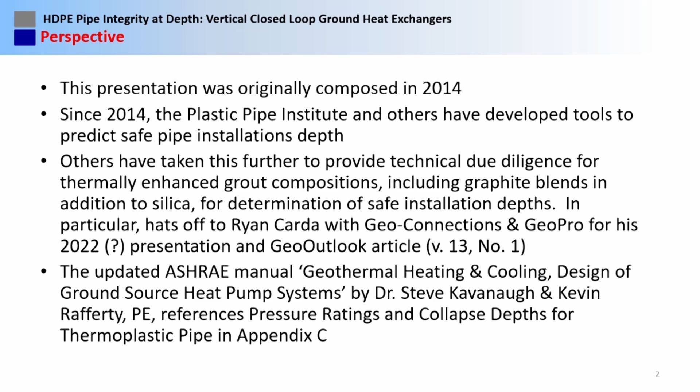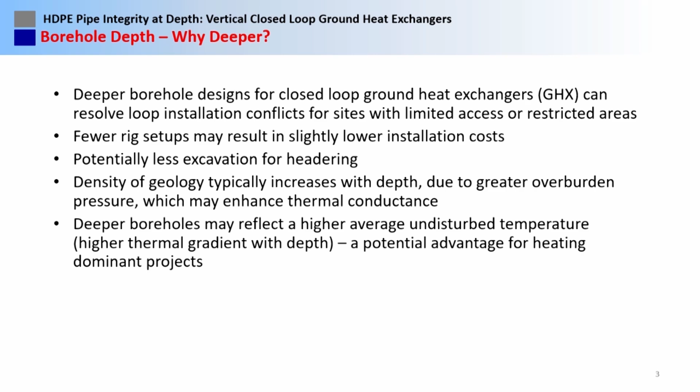So what are the concerns? Well, we worry the pipe's going to burst if it's too deep, or buckle. It'll burst if there's no surrounding pressure - it's going to blow out. On high-rise buildings, you need to put an intermediate heat exchanger between the building and the ground loop.

We need to go deeper, so we have to go to a thicker wall pipe. Well, that's yes and no. I've reviewed projects where we've routinely, for the past 30 or 40 years as an industry, been using DR11 at 300-foot holes. But I ran into one peer review project where the gentleman wanted DR7 on his 300-foot holes. Had a pretty high pressure drop, as you might imagine.

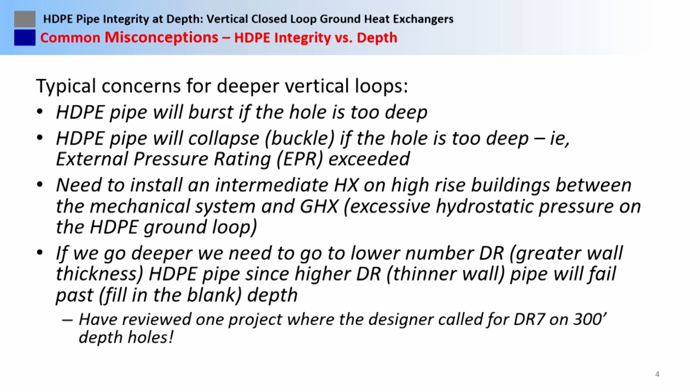So if the preceding concerns were really true, the short answer is our industry would not exist. We would have failed systems right and left. So here are a few examples, anecdotal information.

This is from Beatty Geothermal. Mr. Beatty is now with Salas O'Brien, but he had his own firm, mostly in Toronto. He's got 650-foot deep holes, and this was with PE 3608 - we now have 4710, we'll get into that a little bit more. But he routinely did deeper holes in Toronto because that's all he could do. Just didn't have the land.

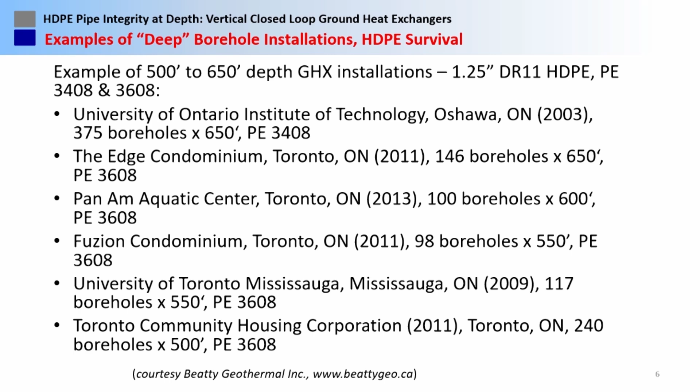Geosource Energy, Stan Reitsma - I don't know if Stan's here or not. Stan's been a great asset too. He's one of those assets I wished I would have met a long time ago, because he routinely goes deeper, because he has to. He's doing like 700 and 800 foot deep holes now.

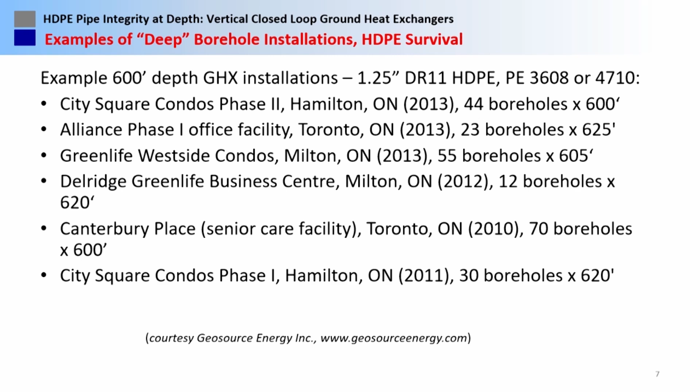I've been in contact with some geo junkies in the Chicago, Illinois area. They've been doing 600-foot depth loop installations for a long time. I found that the Swedes have been going to 200 meters, using DR17 pipe, and they're not failing. Some of my projects in Colorado are routinely going to 500 feet.

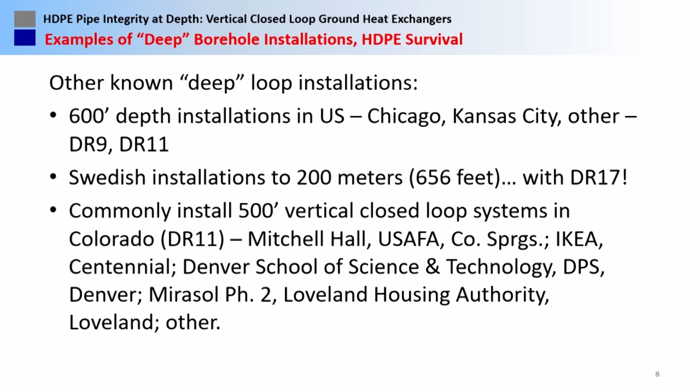We have one at Montana State University where we had no choice - the architect kept reducing the area on us. We had to save the trees, okay, so we go deeper. We went to 700 foot on that. System's working fine. 600, 800, 850, 600, 550 foot - and we're not having problems with these jobs.

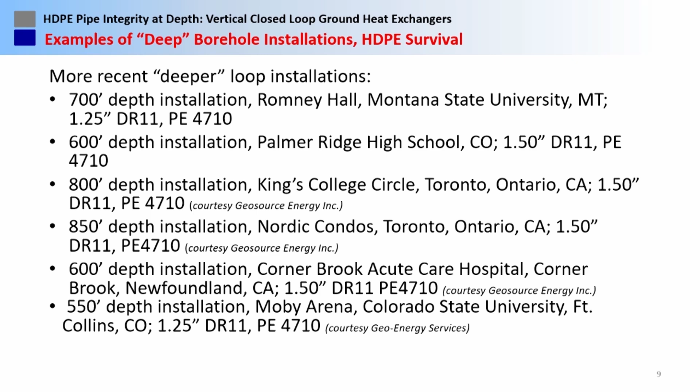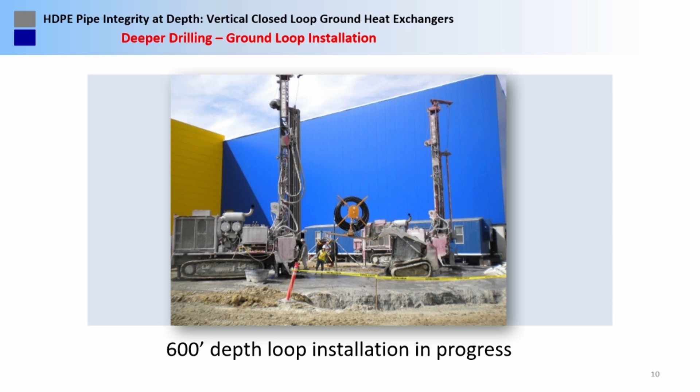And that's Jeff Erlob. Jeff, his company, Salas O'Brien, they're going to be the world dominating ground source heat pump company. They keep sucking people in. Doing a great job.

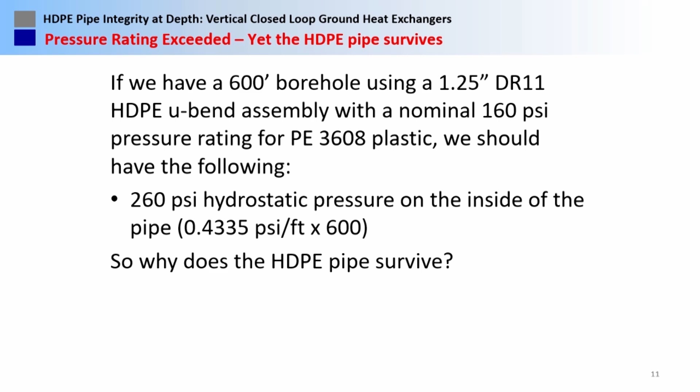We're going to talk about 3608 PE plastic briefly, but remember, the industry has progressed now to 4710, so this is even weaker pipe from that time. One thing we look at is the hydrostatic pressure on the inside of the pipe. You calculate that by 0.4335 PSI per foot times whatever your depth is going to be - pretty simple calculation.

So this example is in downtown Denver - 81 holes, 450 feet deep, but the ground loop has a 9-story building on top of it. So all the hydronic piping goes to the top of that building, and we have no intermediate heat exchanger. It's been up and running since 2008 and has not blown out any pipes yet.

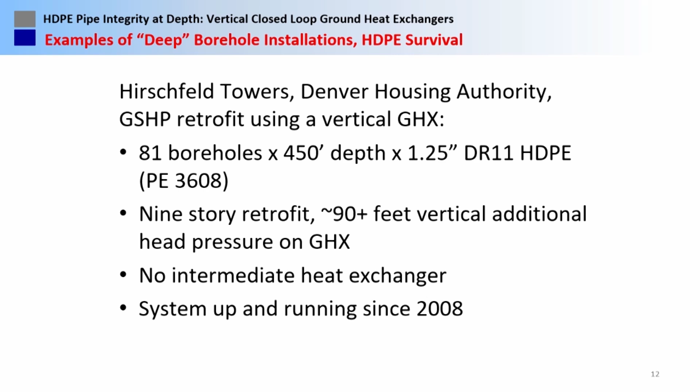Here's what it looks like from the outside. By the way, this building is a retrofit - it was built in the 1960s, so it's low-income housing for Denver Housing Authority. They had 2 problems with the mechanical system: it was dying, and the outside cooling tower - all the neighbors in the neighborhood hated it because it was noisy. The other problem was it's not in a real good neighborhood, so the local, excuse my language, hood rats decided to use the cooling tower for target practice occasionally. So anyway, the city of Denver got tired of fixing it all the time.

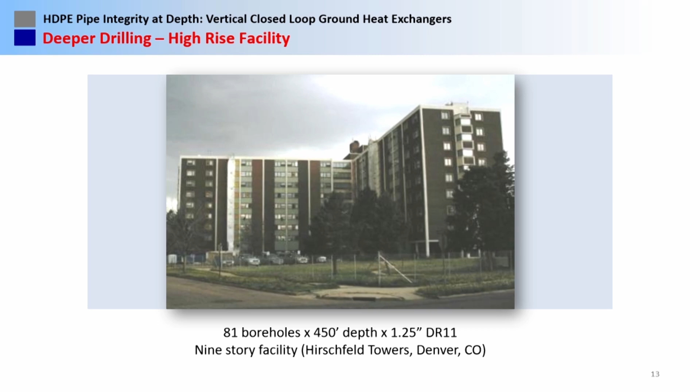So we went to 450 feet deep, inch-and-a-quarter DR11. Like I say, we've got a 9-story building on top of the loop field. So common sense - we have grout around the pipe, we have water in the pipe. So once the pipe is grouted and full of water, how is the pipe going to burst or collapse? It's not - the pressure inside and outside is equalizing out. So that's the common sense part.

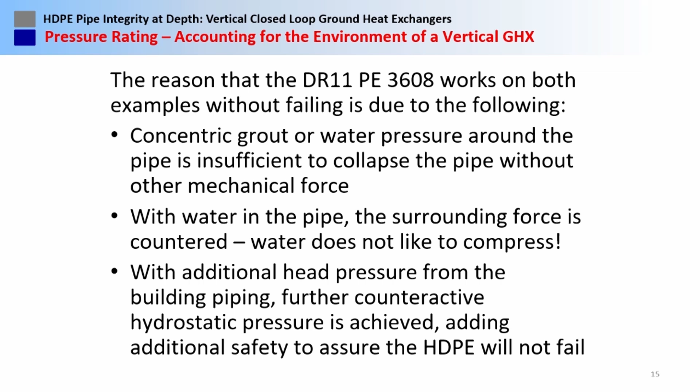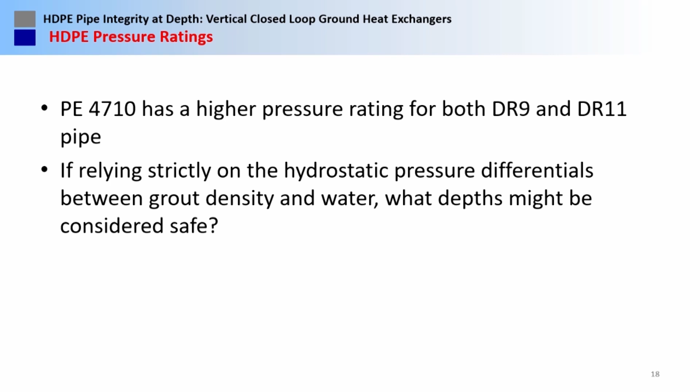But now we have 4710, that's kind of our industry standard for HDPE, so it's even tougher. Accounting for a 600-foot deep hole, the grout using silica grout with a 0.90 thermal conductivity and a 1.0 conductivity thermally enhanced grout, so DR11, we have a nominal safe pressure rating of 200 PSI. So at 600-foot depth, the differential between the water and the grout is very nominal.

And your question, I'm glad you asked that. I want everyone to be thinking about that. If we don't have that unconfined pressure, if we drop a loop in with an ungrouted hole, or we load it into just mud, if it was mud rotary, I want you to be thinking about that, because we're going to get into that and why it's important to grout it fast.

Yes, sir? How are these pressure ratings impacted? We're going to get into that. Yes, sir? Aren't the burst pressures much higher than these?

Aren't there published burst pressures that are much higher than 200? Well, we're going to get into how the ASTM pressures are determined, but these are actual 1/4 the actual burst rating unconfined. So the ASTM values are pretty conservative to begin with.

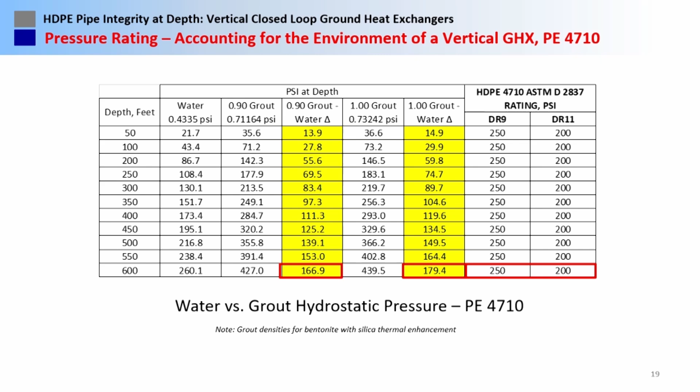And I had a little help with Dr. Matt Anderson, University of Minnesota. Ran into him, he specializes in these kinds of studies. You know, I guess the guy doesn't have a life, he just talks about pressurizing pipe and what it'll tolerate, what it won't, but you can never have enough friends.

Anyways, he helped put up this really cool graph about, based on the published ASTM ratings, we ought to have this kind of safety range for these kind of depths.

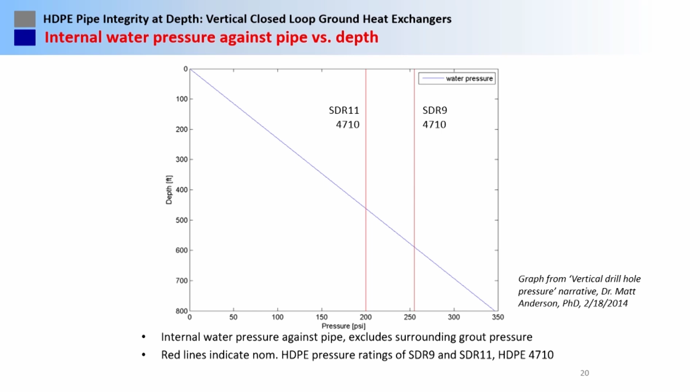And he did another one based on the different densities of thermally enhanced grout using silica. So this is a little dated and vintage, apologize, I haven't been able to update it yet with the bentonite graph, but Ryan Card - I wish he was here right now - actually put together this for thermally enhanced grout with graphite.

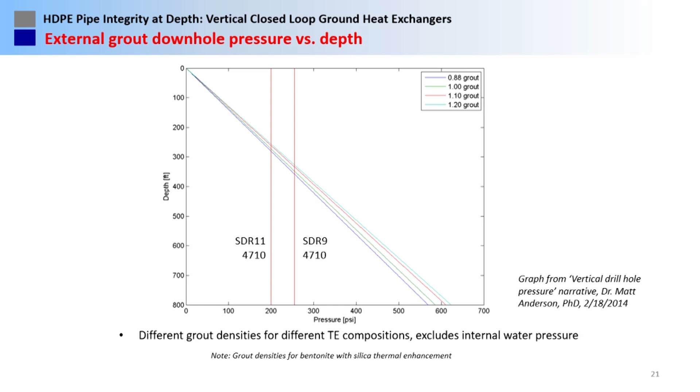So again, with these depths, with the different thermally enhanced grout values, in theory, we should be looking at 700-800 feet on most of these things and still not have a problem.

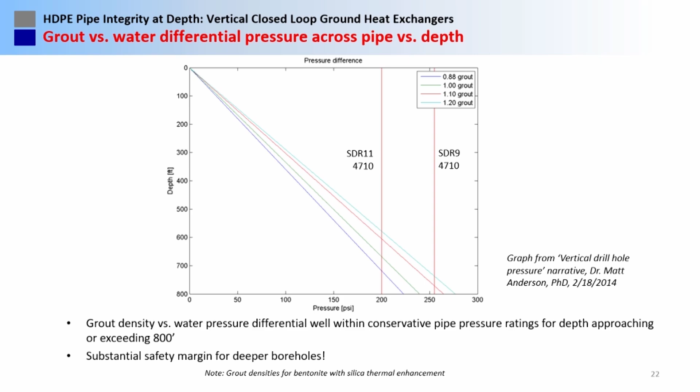So accounting for a vertical loop with 4710, again with the 0.9 grout or 1.0 grout, with the building elevation factored in for our 9-story building, again the difference between the water pressure downhole and the grout with a 9-story building, we're even safer.

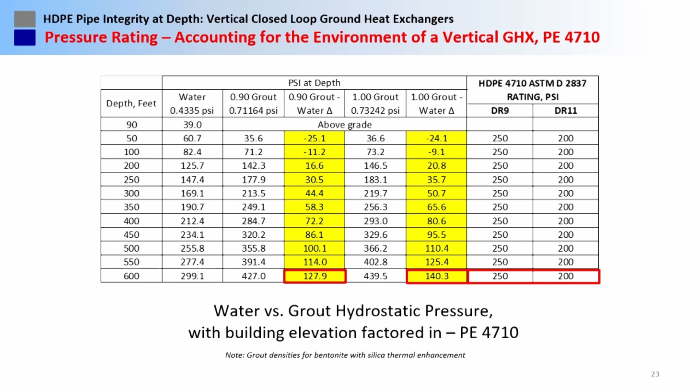So what this suggests is the density of the grout and the water counteract each other. So there's no place really for the pipe to go to fail or anything.

At the time I put this together, I had made the opinion statement that for 600-foot depth, even 3608, we're going to be safe at. But that's a moot issue now, because I don't know any pipe manufacturer that does anything but 4710 now, or the equivalent, the Canadian standard, PE 100. I think that's right.

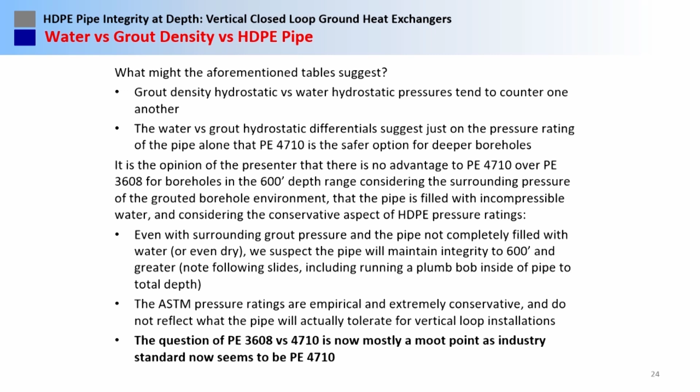But keep in mind, the ASTM pressure ratings are empirical to a certain point. Just a conceptual graphic: you've got water inside the pipe trying to push out, but the grout and surrounding geology are pushing in.

As most of us veterans know, the pipe does not go in and stay perfectly centered. Rotary drills corkscrew the borehole. Sorry for the bad art, I'm not real good at these, but I try. So even if the pipe's up against the wall, it's still pressing against something that's pressing back against the water. Common sense, right? Shouldn't be an issue.

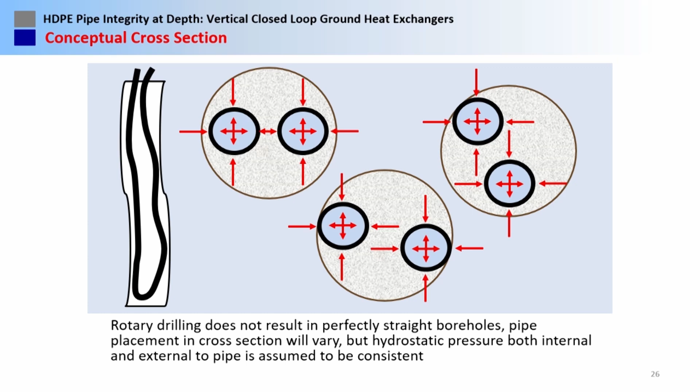So our friendly driller, who was trying to make grief for me after I caught him not grouting the holes in Kansas, said, 'I'm going to prove they're failed.' So we cut the pipe on some holes and sent down a plumb bob.

I swear, our last martini was at 10 o'clock last night. I haven't had any today yet. So...

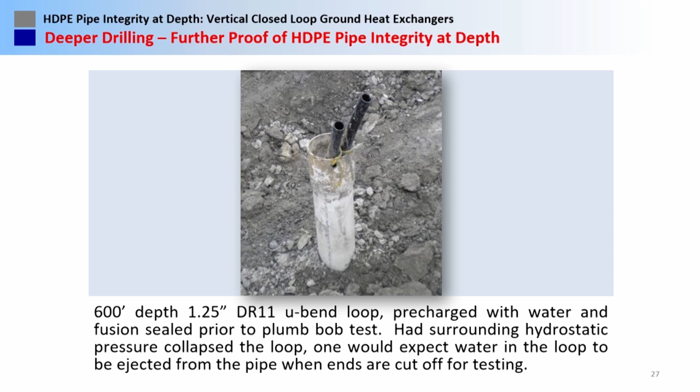So we tested one ground loop, grouted full of water. The plumb bob went down both legs without a problem, came back fine. We moved to the next one, and the next one, and the next one. Then I said, hey, we've got a couple holes you haven't grouted yet. Let's put that plumb bob down there, and let's pressure test it too, because theoretically it should blow out. Guess what? It didn't. Worked just fine.

So Mr. Driller, who by the way I did not want on the job - there were like 3 drilling contractors experienced in this part of Kansas City for deeper boreholes, and you could have spit on all their bids and hit them, their costs were about the same. Well, this guy came from 3 states away and was 50% cheaper. The reason he was 50% cheaper was he wasn't grouting the holes. He wasn't following specs, and he got caught.

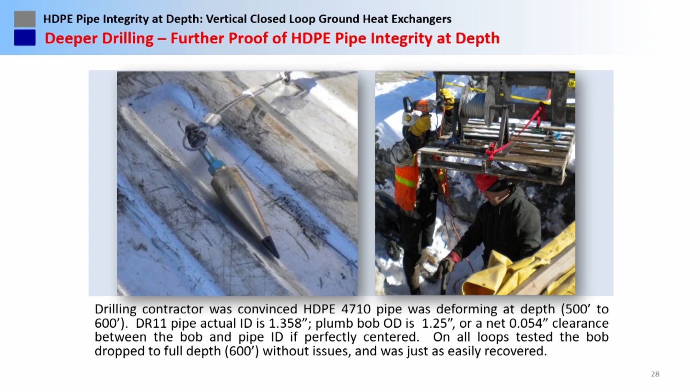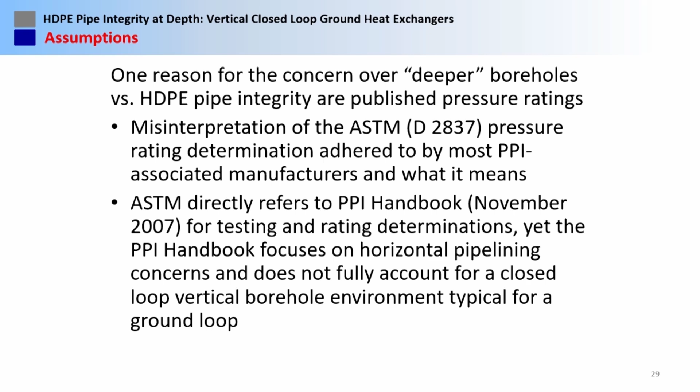So one of the reasons people are concerned is they don't understand how the ASTM standards are determined. The Plastic Pipe Institute has since updated this, by the way, so this is a little dated, I apologize. But at the time, we really didn't have ASTM information in the handbook for the environment of a vertical ground loop. Very frustrating. So how's it determined?

Pressure rating in PSI for the ASTM D2837 value is twice the hydrostatic design stress rating in PSI, divided by the DR ratio minus 1. So for 3608, we can actually go to 800 PSI, and the pipe, that's about where it should burst without any confinement. For 4710, we should be able to go to 1,000 PSI before we're concerned about bursting it with no confining pressure.

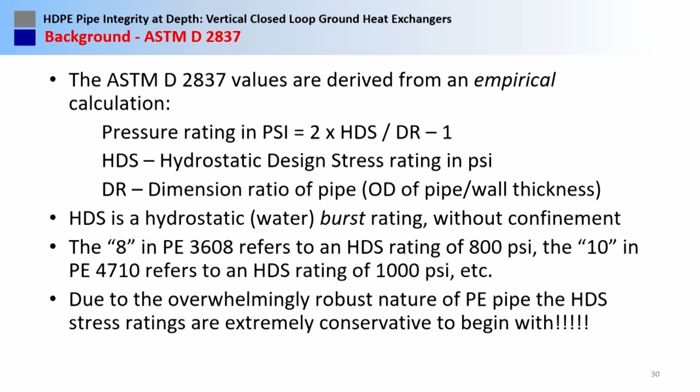So for PE 3608, DR11, that's how we get the 160 PSI rating. But that DR11 pressure rating, it doesn't matter if it's 3/4 inch pipe or 6 inch pipe, it's the same pressure rating. Well, that doesn't make sense, because have you guys seen a cross section of 6 inch DR11 HDPE? You can run over that pipe with a 1-ton truck, and you might get it to oval a little bit, but that's about it.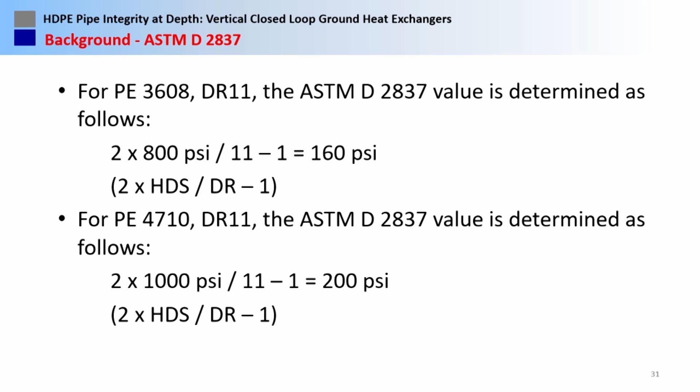This stuff is tough. So for 4710, using the same calculation for how the 2837 value is determined, we should be more than safe to 200 psi. I won't go in and read all this, we'll burn too much time.

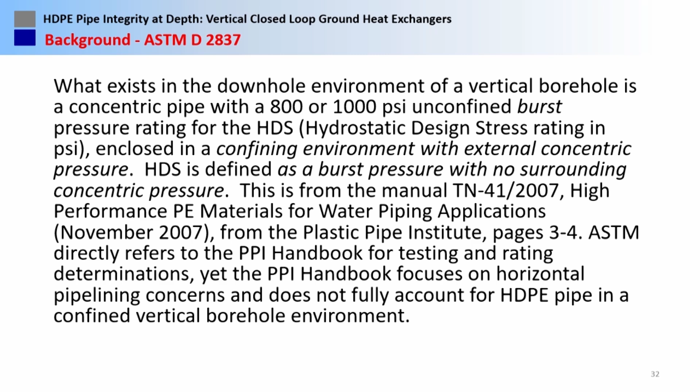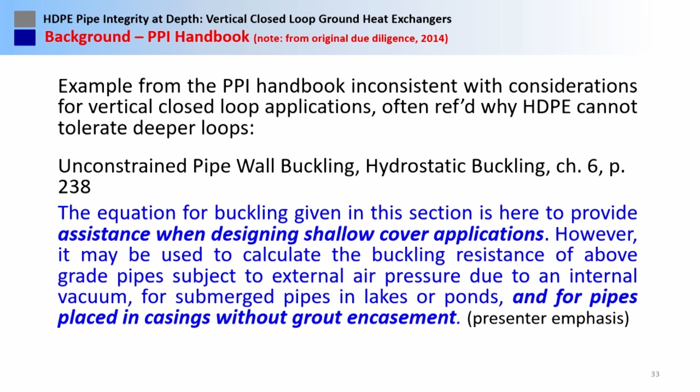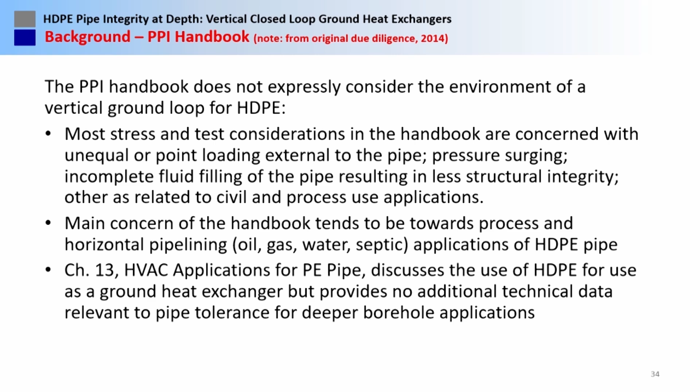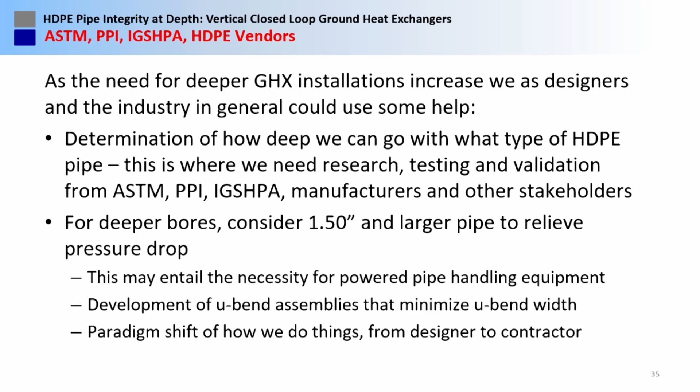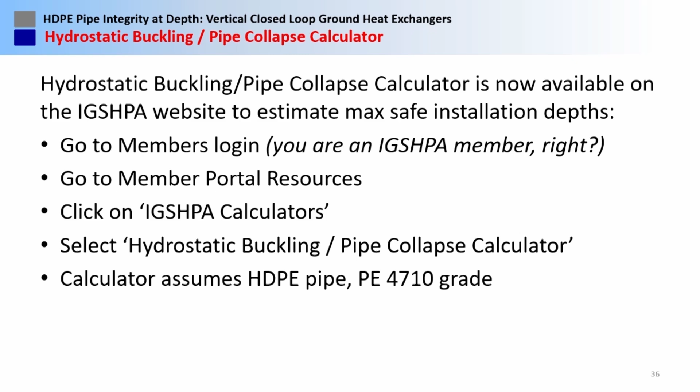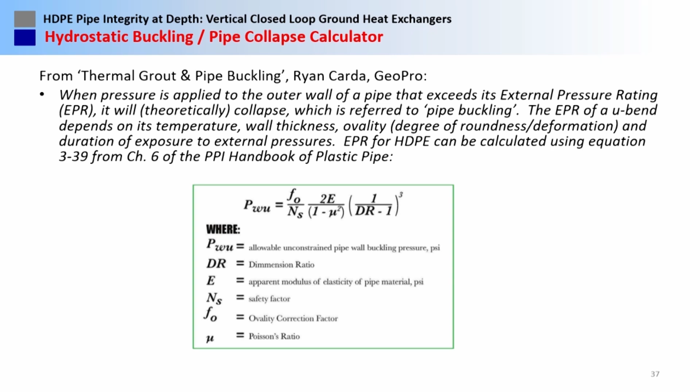Directly from Ryan's comments, the external pressure rating, or EPR, is where it will theoretically collapse, referred to as pipe buckling. EPR of a U-bend depends on its temperature, wall thickness, ovality - that is the degree of roundness or deformation - and duration of exposure to external pressures.

That's really important when you think about it - you get the loop loaded with water, why you don't want to wait to grout it. Not only is it a bad thing, you might bridge off a borehole, but you want to get that confined pressure around that pipe as soon as you can. And the deeper you go, the more important that becomes.

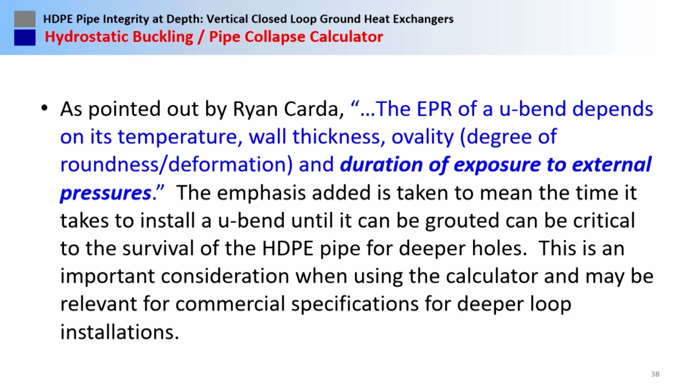So I ran a couple of the calculations just as an example. Assume DR11 1.25 pipe, pipe ovality of 3%. By the way, on the calculator, it'll have some suggestions like what to select for safety factor, ovality, that kind of thing, if you don't understand all that. The important part, in my mind, is the duration of sustained loading.

That's how long does it take to actually grout the hole after you've got it loaded in the borehole. In this case, I made an assumption - maybe it's in the summer, so we're loading that pipe while it's 95 degrees outside. We also consider Poisson's ratio and density - that's for water, 62.4 pounds per cubic foot of water. And I've had people say, well, we've got antifreeze. No, you don't put antifreeze in until you've got the air purged out of the system. You should never do that.

Why? Propylene glycol, if you're using that for antifreeze, likes to entrain air. So why would you want to fight that when you're purging? Just a tip. And then also, we take into account the grout density, and there are tables to select from on the online calculator. So in this case, for 1.25 DR11 pipe, we should be able to go to 800 feet safely.

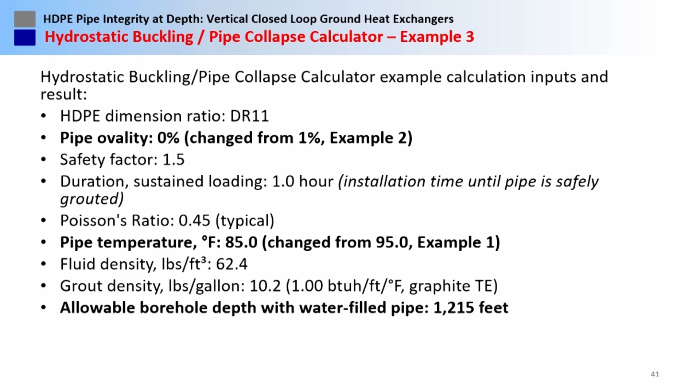Now, here's the what if scenarios. Talking with Stan Reitsma, who's a veteran at deep hole loop installation, he's concerned - what if you got a bunch of scratches? Not general handling, but a deep gouge into that pipe. We don't really know if that could harm the integrity of that pipe, but it could, in theory. So again, it's how you handle that pipe. There's not much you can do once the pipe's scraping along the edge of the borehole. So there's a lot of unknowns still.

The other thing is when you start working with that calculator, ovality, or how round that pipe is going in the hole, is really, really important. It will really limit you on a safe depth, or what the formula says it will do.

I just, when I go out with drillers, I share this information, and they're concerned. They don't want a failed system. So they work with their guys to try and stay above board.

My problem now is our industry is really heating up, so we're going to attract new drillers. We need them, we need them. The problem is a lot of them aren't going to have the experience and not understand these critical considerations.

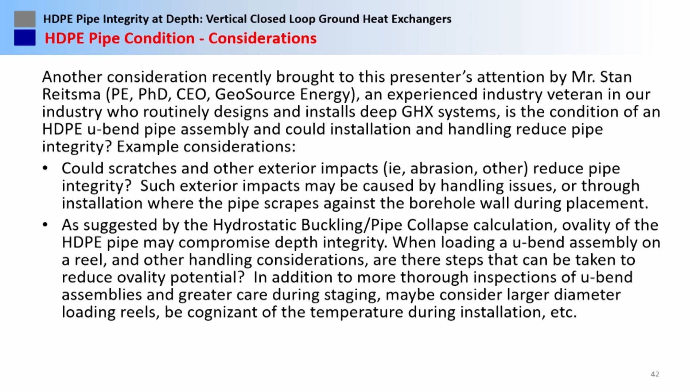So, conclusion and options. In my opinion, if it's purpose-milled for going in a ground loop, it'll tolerate a lot deeper depth than you think it will, or what the ASTM unconfined pressure ratings say.

Good pipe handling is important. And what I think is most critical, based on the calculations, is how long it takes you to grout that hole - that's very important. So when I catch a driller saying, I'm going to drill all week and grout the last day - no, you're grouting as soon as you are at total depth, load that pipe.

Either the tremie pipe goes down with the U-bend or follows it immediately. And well, that's going to take more time - we'll do it, that was part of the spec, we expect it. Most competent drillers that are responsible say, I understand that we're going to do it the right way.

I still think we've got a theoretical formula now - I'm not very smart for research and all, but I would love to see the Plastic Pipe Institute, various pipe manufacturers, figure out what we can really do with pipe. How deep can we really go and have some due diligence and actual research? Because we know it'll go deeper - we've got a theoretical calculator for that now. But where the rubber meets the road is some actual testing.

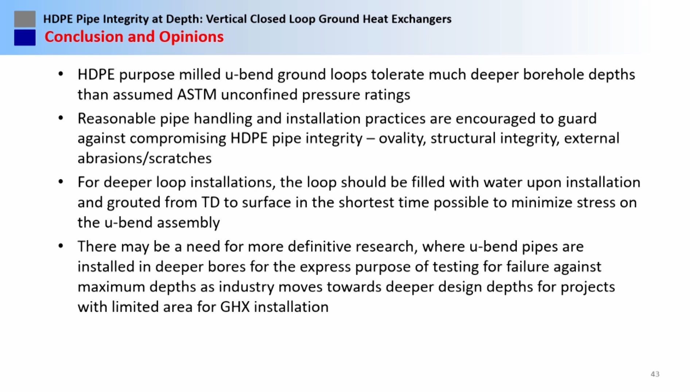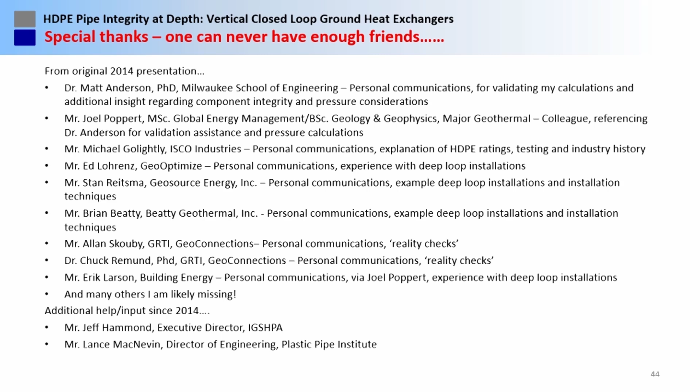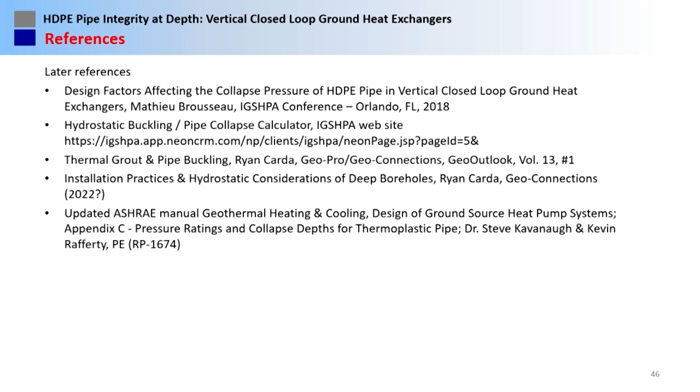And just some thanks. Initially, I bugged all these poor guys back in 2014, and recently Jeff Hammond, Lance MacNevin with PPI, and then I had a lot of references, and I do cite Ryan Carda's information - he's got a plastic pipe publication with Geo Outlook, the old IGSHPA publication, back in volume 13, I think that was 2016 or whatever. And then installation practices, another reference from Ryan Carda. And then finally, the new IGSHPA updated version of the ASHRAE geothermal heat pump design manual.

Appreciate it. Hopefully I didn't misspeak too much.